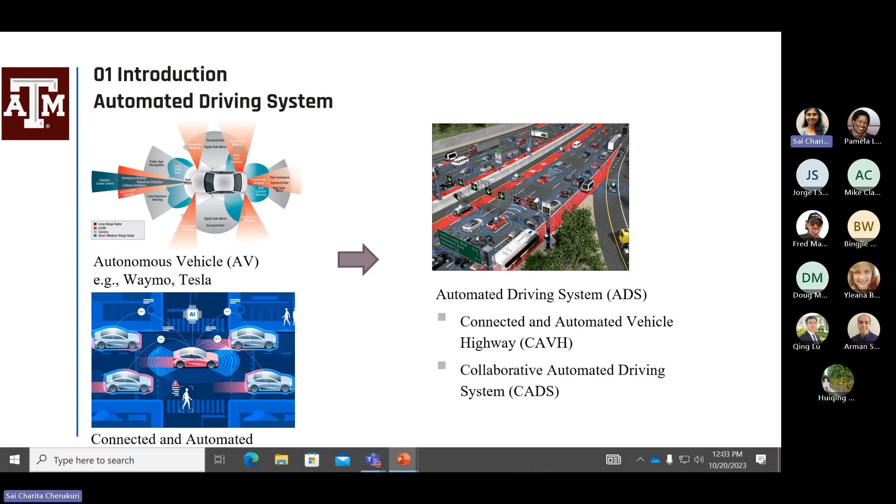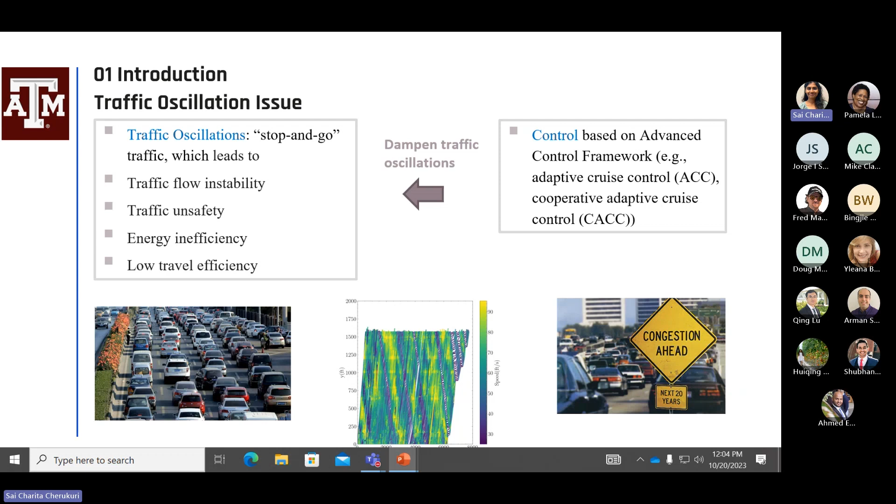One of the traffic problems that we daily experience is traffic oscillations. Specifically, we experience stop and go traffic. When a little stop and go happens at the very leading vehicles, this stop and go phenomenon can get amplified, which leads to traffic flow instability, traffic unsafety, energy inefficiencies, as well as low travel efficiencies. So enabled by connected automated vehicles, we aim to develop control based on advanced control frameworks, such as adaptive cruise control and cooperative adaptive cruise control, to further dampen this traffic oscillation.

Nowadays there are generally three types of methods. The first one is linear or nonlinear analytical CAV controllers, then model predictive control, as well as traditional deep reinforcement learning controls, and all three have some pros and cons. For the linear or nonlinear analytical CAV controllers, they are very easy to implement and very convenient for stability analysis since they are analytical. But it's really hard to explicitly incorporate multiple objectives as well as safety constraints.

For model predictive control, it can optimize multiple objectives in a flexible constraint framework, and it can achieve accurate control performance by a rolling implementation horizon. But sometimes it requires the formulated problem to be convex and to solve it online. Once the MPC is very complex, it is usually computationally demanding for real-time implementation.

For the traditional deep reinforcement learning-based controllers, they can capture varied and stochastic characteristics by embedding this stochasticity in the training environment. The neural networks help to better solve integrated non-convex control problems. Once you train it like a black box offline, it can be really fast computing in online implementation. But sometimes the training process is unstable, it lacks interpretability due to the black box property, and it's poor for generalization, especially for some corner cases, where it performs really badly.

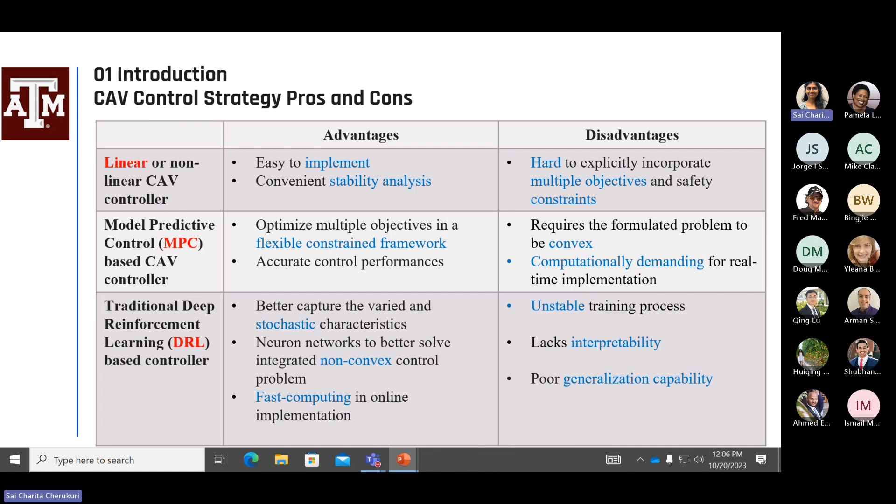So in this sense, let me further refine the CAV control strategy challenges for mixed traffic, especially in terms of traffic oscillations. Firstly, how can we develop a fast, multi-objective, and stable control method to achieve system-level performance? We know the deep reinforcement learning approach is usually AI-driven and data-driven, and it's really hard to incorporate control theories to facilitate the control performance.

Another question is how can we incorporate traffic flow theory into this microscopic CAV control? Furthermore, there are also some strong assumptions, for example, perfect communications between CAVs and perfect vehicle dynamics for CAVs. So especially in the context of mixed traffic, all of these difficulties require a new framework or new thinking to organically integrate control theory, system stability analysis, AI, traffic flow theory, and simulation experiments together to have better CAV platoon control or car following control.

So with these challenges, we need to better understand the human-driven vehicle stochastic and uncertain nature in the mixed traffic, as well as the heterogeneity of the mixed traffic with different topologies from different combinations. So given that, I will further describe our research scopes and overall structure.

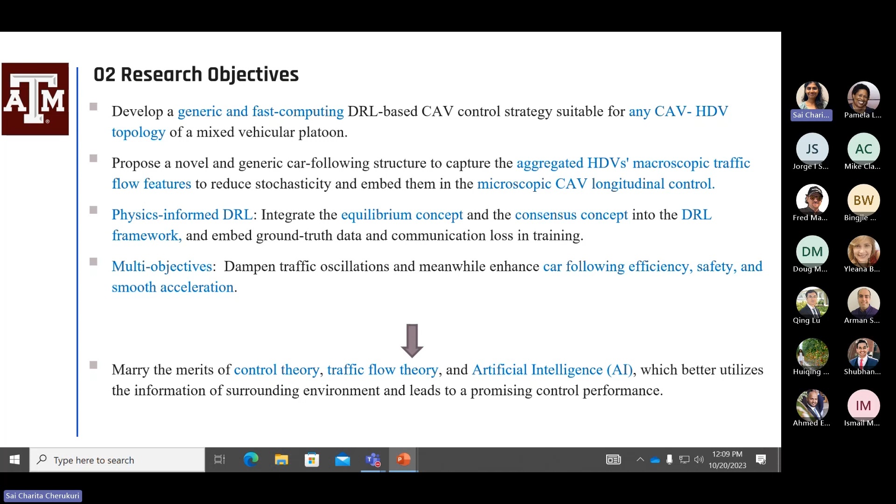And we will further integrate the equilibrium concept as well as the consensus concept, widely known in control theory, into this deep reinforcement learning framework. We also aim to achieve multiple objectives containing traffic oscillation dampening, as well as car following efficiency, safety, and smooth acceleration. So in this work, we aim to marry all these very advanced theories into an organic framework specifically for the control task.

So essentially, we can divide the local downstream communication environment for mixed traffic into two broad traffic scenarios, and the fully connected automated environment has been analyzed very widely before. But we are focusing on the mixed local downstream environment of CAV, HDVs, and CAV topology, because once you have any combination, you can always find these topology structures.

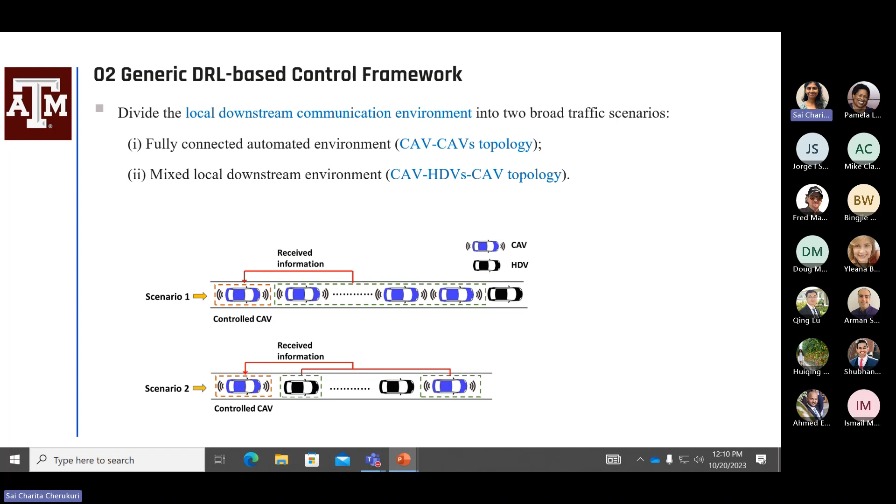And here are some environment assumptions for our research, to clarify beforehand. We assume that CAV state information, such as spacing and speed, can be broadcast to the upstream CAVs through vehicle-to-vehicle communication in real time. The CAV can receive real-time state information of its immediate preceding vehicle using robust onboard sensors. And the CAV can obtain its own real-time information.

We also assume some vehicle communication mechanisms, and here we just use a signal-to-interference-plus-noise ratio as a representation. The automation of CAVs is assumed to be level 3+, and HDVs have no communication capability. So given the assumptions, let me further move on to our control framework.

So given this CAV, HDVs, and CAV structure, we have state fusion strategies and deep reinforcement learning-based car following controllers. Once we output the car following control input, it will go through the vehicle dynamics. The main philosophy of our control is based on these state fusion strategies, which can better help to incorporate macroscopic features to reduce HDV stochasticity. Let me further explain it.

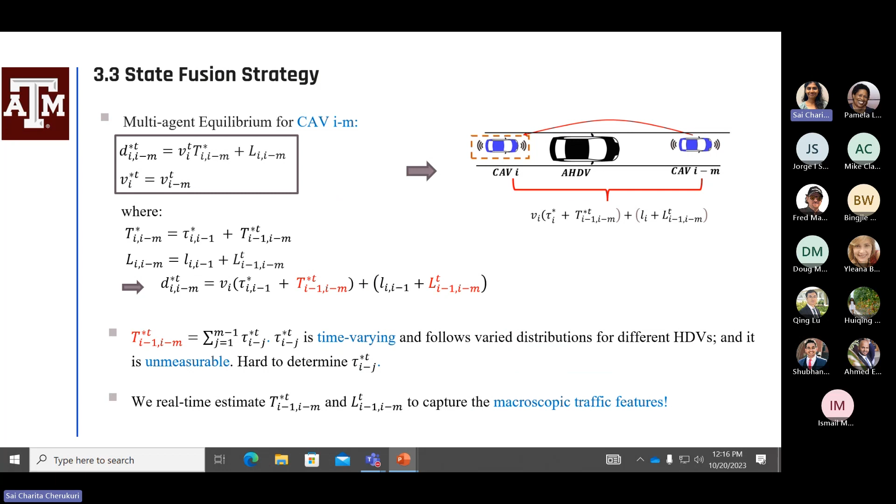So essentially, when we compute this multi-agent equilibrium for CAV I minus M, it equals the summation of the gaps between vehicle I and vehicle I minus M for all HDVs inside. And then we have this time-variant distribution of the aggregated HDVs' time gaps. And we know it is like a fundamental diagram, and that's why we better capture the macroscopic traffic features.

So essentially, we use a simplified Newell's car-following model to bridge it, and from the simplified car-following model we know, once you aggregate it, it's very related to the congested spacing as well as the kinematic waves. So using this, we define a real-time estimate for these traffic waves, and then better guess the aggregated time gaps for the aggregated HDVs within each CAV.

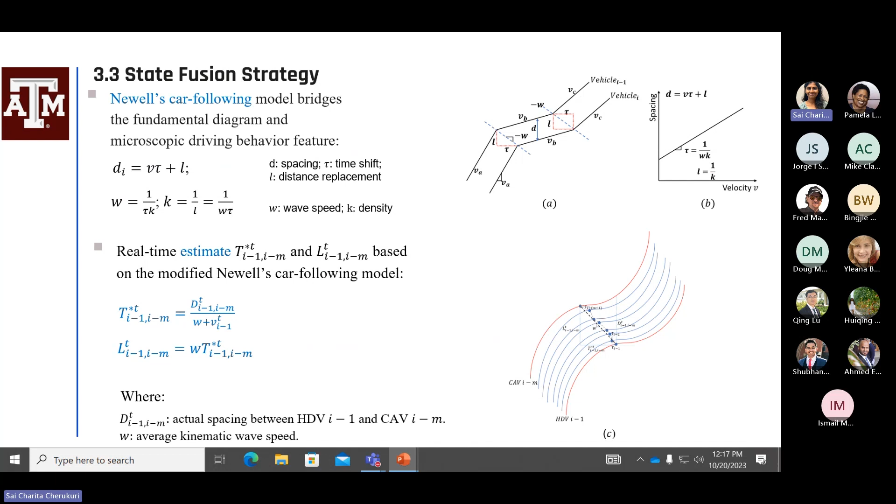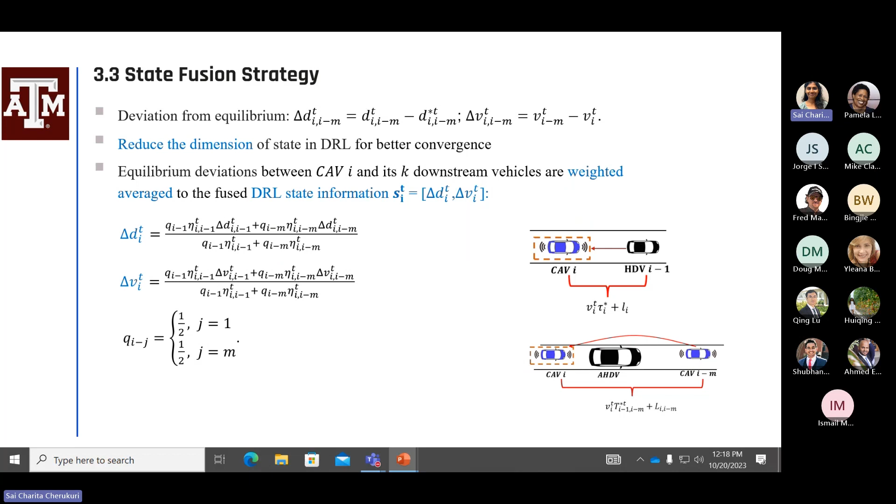So by that, we can compute the deviation from equilibrium spacing between any vehicle I and any vehicle I minus M. And it helps to reduce the dimension because we don't guess what's happening inside this aggregated HDV. We just focus on the HDV itself. And we feed forward, firstly, the spacing between CAV I and the AHDV, as well as the spacing between the AHDV and CAV I minus M. And by some weighted average, we can compute the general deviation from equilibrium spacing for this distance, as well as the speed difference.

So based on that, we try to incorporate this state into the deep reinforcement learning framework, which has 4 components: the state, the reward, the environment, as well as the action. Specifically, we define the state representation as the weighted average spacing and speed difference. And then we define the action as the vehicle's acceleration. Essentially, training a DRL is to find the optimal policy, or the optimal parameters of this car-following neural network. And then we need to better design a reward to realize this deep reinforcement learning training.

So all these elements are very important, specifically the reward design. Firstly, we have objective 1, which is the car-following control efficiency, and we intentionally set it as a quadratic summation of the state deviations. This quadratic form of the state is intentionally designed because we want to make it very similar to a linear quadratic regulator in linear control, to keep the state close to the predefined equilibrium. And these terms can better help regulate all the deviations back to the equilibrium.

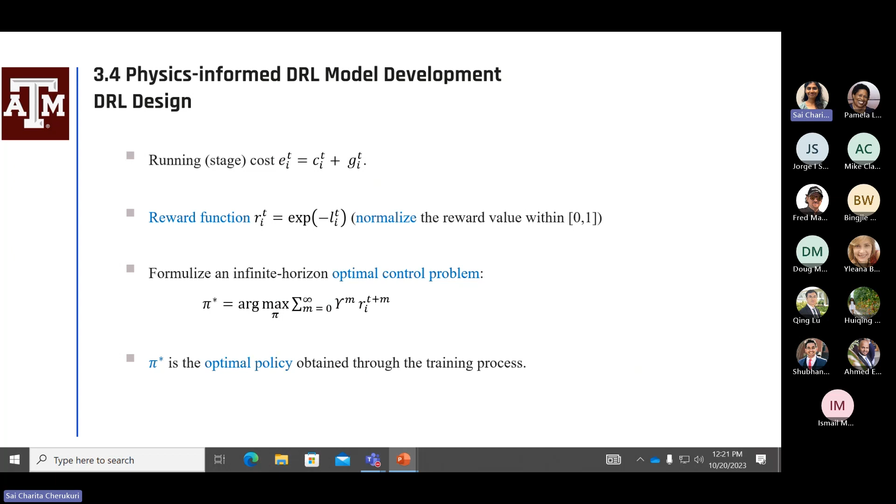And the running cost for the DRL actually is the summation of those two terms, and this is a very practical routine for DRL practice, and we let the reward function be the exponential terms weighted by the times, and then we just try to find the optimal policies. And here we just applied the widely known distributed proximal policy optimization algorithm to train the neural networks. And here are some hyperparameters.

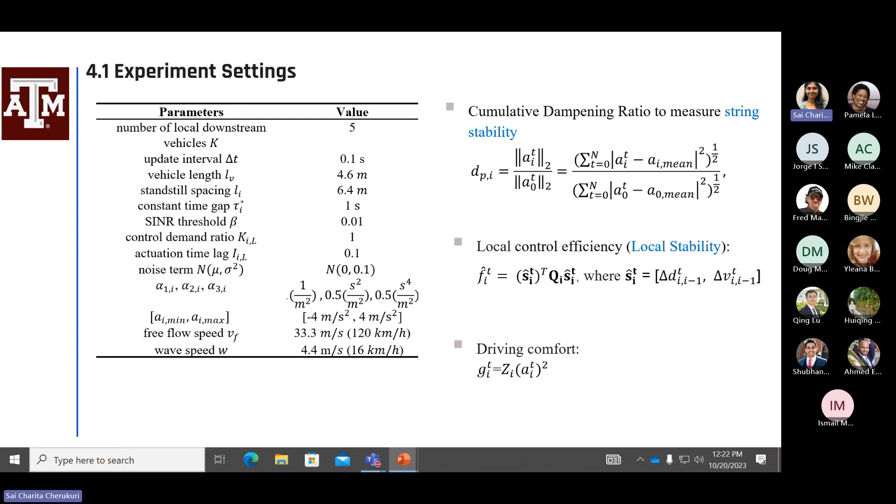So given this very routine strategy, though very novel in terms of the state fusion, let's see how it works. We further define some metrics such as cumulative damping ratios to measure the string stability, widely known in control theory, and we also measure the local efficiency to see whether it is locally stable, and we use the driving comfort term, the square of the acceleration, to see whether it can provide a very smooth control.

And here are some examples that we ran. The first one is the distributed CAV control by our method. Another one is decentralized CAV control, which does not care what happens downstream, only the vehicle you are following. And we also compare with other strategies, for example, the linear-based CACCs and the model predictive control-based CACCs. As you can find, our method provides the lowest damping ratios, which means we can better stabilize the mixed traffic. We also provide the lowest driving comfort cost, so our control is better, and we can provide larger average velocities based on this analysis.

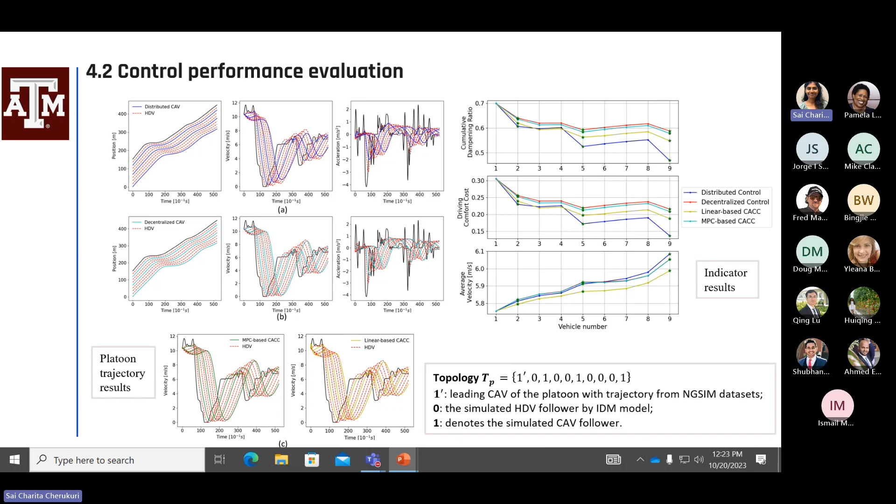We also conduct a sensitivity analysis for the mixed platoon with different penetration rates. Here they are all positions, but one is colored with velocity and one is colored with acceleration. We can find that especially when there are no CAVs, once there's a little bit of traffic oscillation, it gets amplified through the vehicular string, manifested by the speed decreasing and the acceleration oscillating. And we find that once the CAV percentage is around 40%, we can achieve very smooth traffic control.

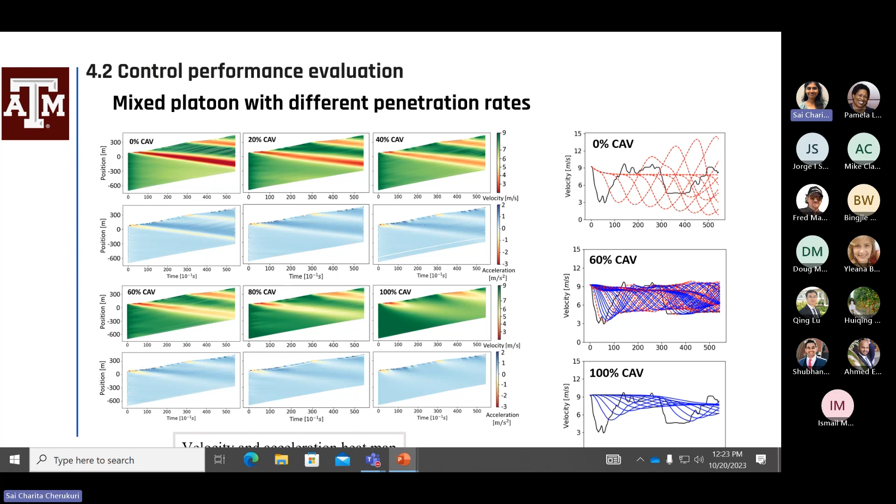We also conduct a generalization capability test with 150 data sets, essentially different traffic scenarios with different traffic oscillation characteristics. We find that our control is really robust and can achieve the damping ratio regardless of the market penetration rate. But once the penetration rate increases, it benefits the traffic flow generally in terms of damping ratio, driving comfort, as well as average velocity.

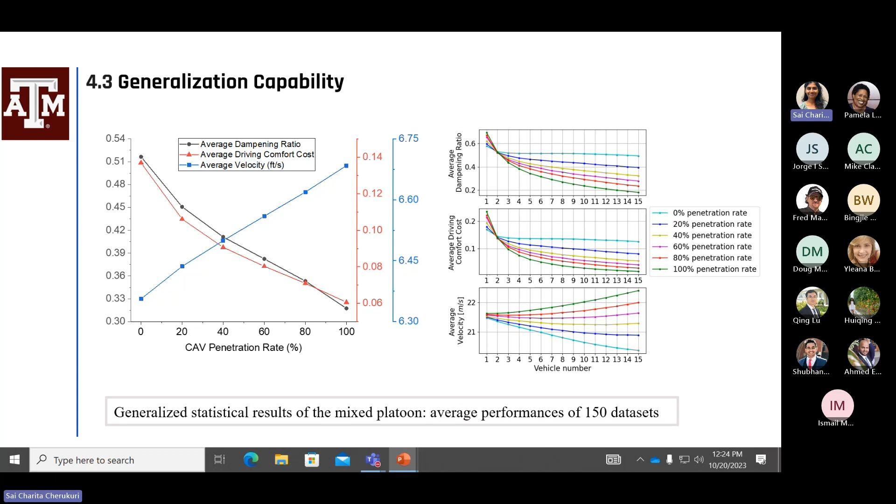We also set some irregular initial conditions to mimic merging behaviors, and we found that our method can also quickly recover to the equilibrium while still dampening the traffic oscillations.

Then let me move on to some summaries and future extensions, not limited to this work. For this work, we developed a generic and fast-computing deep reinforcement learning based CAV control for any topology, even under communication loss, nested in the training environment. We also propose a novel and generic coupling structure, CAV, aggregated HDVs and CAV, to better capture the HDVs' macro traffic flow features. And we integrate control theory, traffic flow theory, and AI together, which achieves better control performance than state-of-the-art methods.

Well, then we are also thinking, essentially the road is not straight, right? In the urban or rural environment, the CAV movement is essentially two-dimensional. So the question comes: how can we readily extend our framework to 2D? Essentially, we apply a curvilinear coordinate, and the philosophy is very simple. One axis is along the center line of the path, and the other axis is perpendicular to the tangent of this path. So it's really different from the traditional Cartesian coordinate.

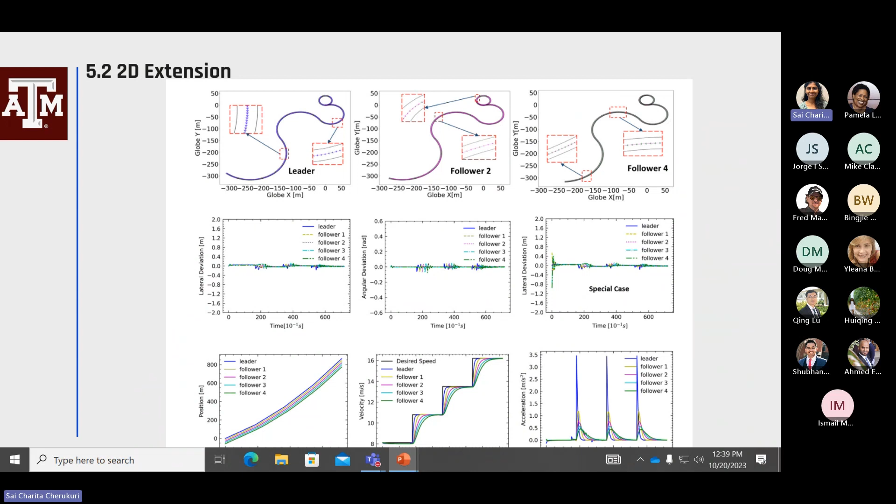Yeah, thank you. Some questions for you. First, I'm wondering, can you share some insights into the stochasticity in human drivers? I noticed you had two papers. My question is, do you find the stochasticity only in acceleration or in both acceleration and deceleration? And are they actually independent random processes?

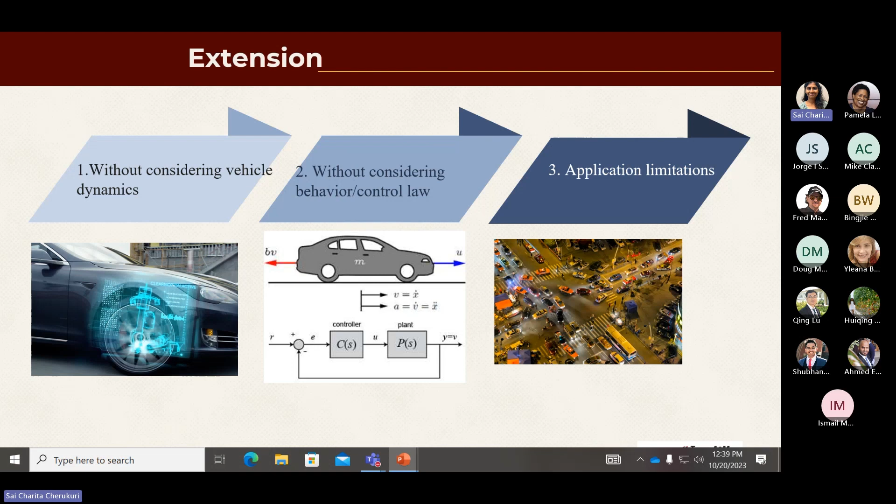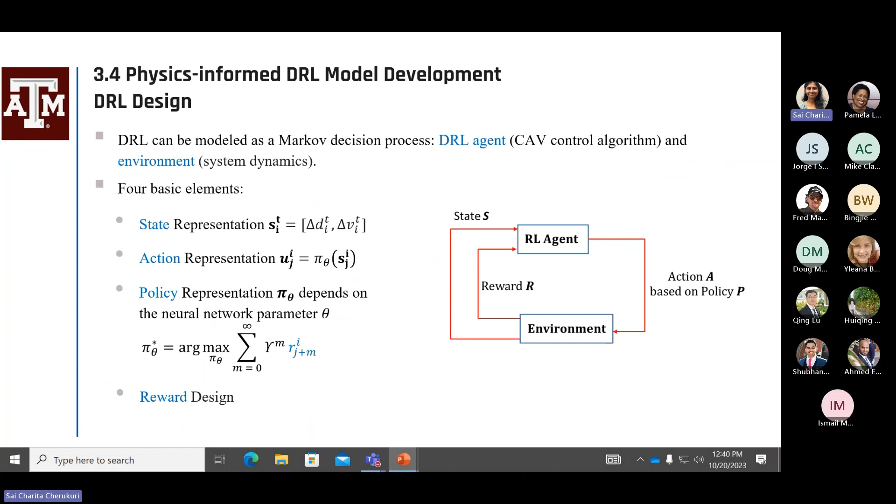Okay, cool, that's a great question. We know that individual drivers are very stochastic. For example, in these two papers, even for one driver, we find there are intra-heterogeneities as well as inter-heterogeneities for human drivers. And based on our approach, especially this one, we also find even the law, or the functions of how they respond, are really different.

So that's why in our papers, rather than capture individual vehicles' behavior, we capture a string of vehicles' behavior, because we know macroscopic fundamental diagrams work. I believe you are also an expert in traffic flow theory. The aggregation of human drivers' behaviors follows the triangular fundamental diagram, though there's some stochasticity inside. But once you sum it up and take expectations, by the central limit theorem it should follow a normal distribution. In this sense, we reduce the stochasticity.

But I agree with you, for individual drivers, even a very small random noise may result in very different behaviors, varying from person to person and also over time. So that's why we use aggregated HDV behaviors in our control framework.

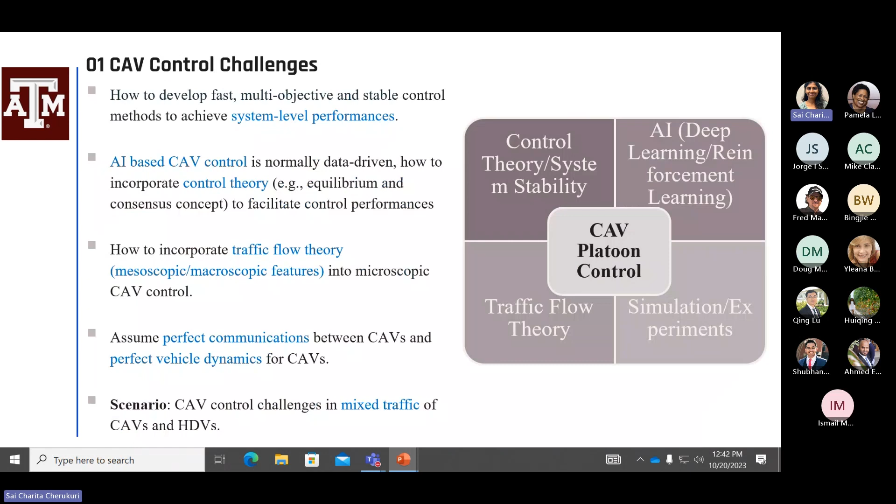Yeah, I agree. Actually, the errors for human driving are compared to the mean, and the mean is Newell's model. I want you to comment on whether the deceleration process is more deterministic compared to the acceleration process, since you have shown data on stochasticity here. Yeah, that's a good problem. In this framework, no, we didn't really distinguish acceleration or deceleration, because we used Newell's model to capture it, and Newell's model is symmetric.

But one way we accommodate this behavior is that we estimate Newell's model in real time, to reduce deviations from the simplified Newell's car-following model. But I agree with you, because Newell is symmetric, if we used an asymmetric simplified Newell's car-following model, it could work better. Still, with this philosophy, it performs pretty well compared to state-of-the-art methods. Okay, thanks so much.

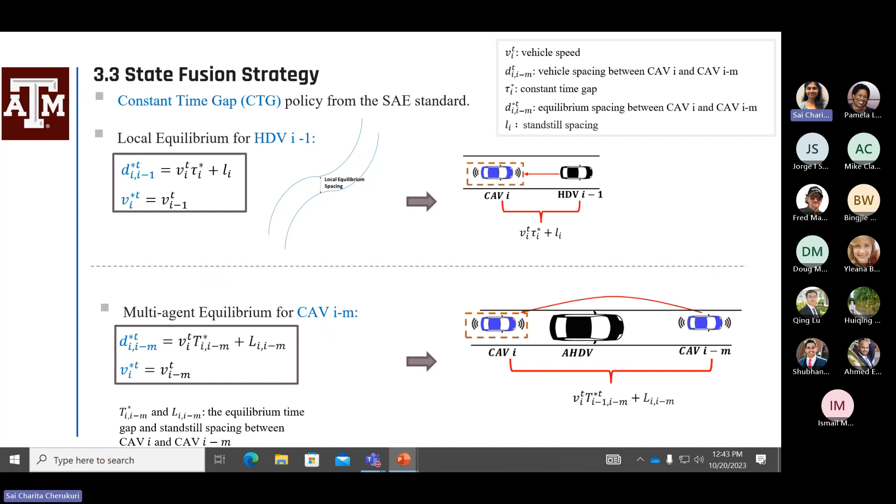Next question. I don't quite get the DRL framework here. Can you briefly elaborate on what the state for the CAV is? I get the point that you try to get aggregated features, treating all the vehicles between CAVs as a whole based on Newell's model. Then those aggregated features are sent to the following CAV. Starting from there, what is the following CAV doing?

Sure. Firstly, the state is a weighted average of two car-following processes. One is controlled CAV i following the HDVs, and the HDVs following CAV i minus M. We consider both spacings, and by weighting them, we compute the deviations from the desired equilibrium spacing for those two car-following processes and fuse them together by weighted average.

So that's what we call state fusion strategies, because we consider two car-following processes: CAV I follows AHDV, and AHDV follows CAV I minus M. Because if the AHDVs deviate from their equilibrium, they will keep generating these oscillations, right? So by this weighted average, we bestow our controller with some predictive capabilities, because we also want to anticipate what happens as this AHDV follows CAV I minus M. So that's how we do state fusion: basically, two coupled processes in a holistic manner.

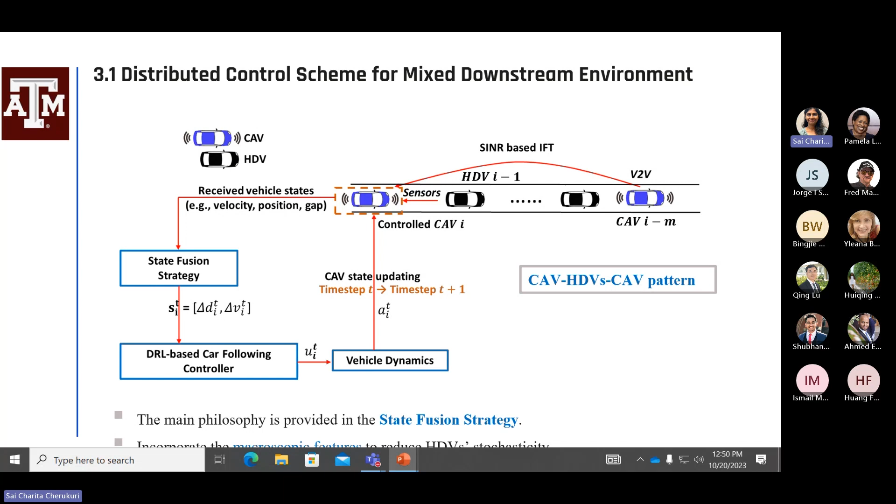I'm not in this field, but it seems to me that your model framework is mainly for the longitudinal control of vehicle movement. Can this accommodate interruptions like lane changes, on and off ramps, and intersections? Yes, actually, that's what I'm writing right now, a proposal called universal control laws for this. But in general, think about it, right? That's a really great point. Oops, I just messed up the direction.

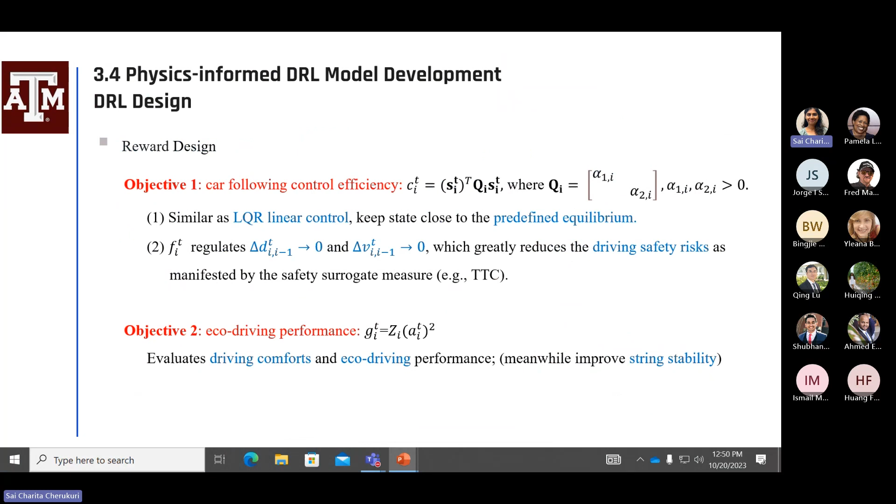Let's say this is a 2D car following, right? And think about there's one vehicle merging. Firstly, this is changed from 2D to 1D already by this curvilinear coordinate, because the path is already one axis, and it's on lateral behaviors.

If there's merging, for example, the vehicle CAV I-1 is some vehicle that's going to merge in, but on another curvilinear coordinate. But you can still put these two curves as one curve, by what we call virtual platooning. Because once it merges, then it's still coupling behaviors after the merging, right? So by this anticipation, we also did some problems very similarly by this virtual coupling concept, or even what we call a time-varying virtual coupling concept. But still, if it's a merging problem, then this is a ready extension.

Well, for the intersections, it could be very tricky. So that's why we wrote a proposal about it. But essentially, my intuition and answer is yes, it can also be changed to a certain level of coupling problems by a comprehensive, systematic dimension reduction and a virtual coupling concept. This philosophy still holds, though it has not happened yet. But my intuition is, you can apply coupling to every driving task, especially microscopic driving tasks, by this very intuitive 2D extension.

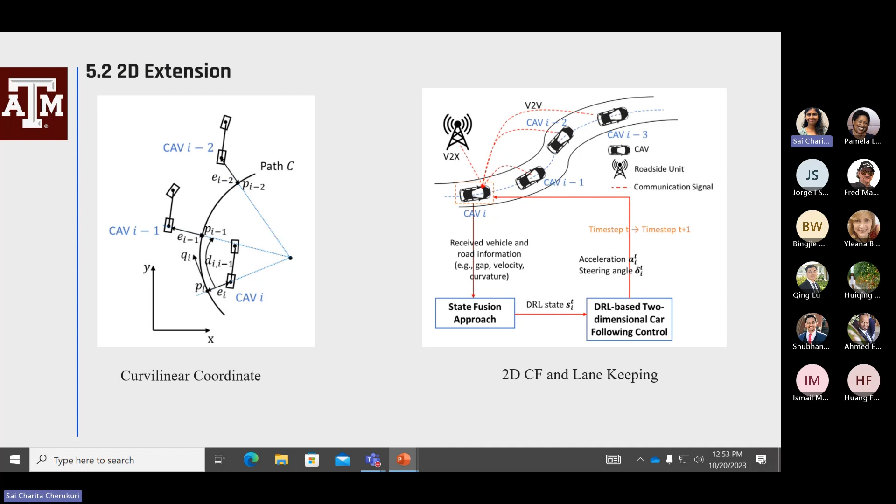Yeah, thanks so much for the question. So here, what we assume is that we can control the vehicle by ourselves, because level 1 is essentially cruise control, then level 2 is adaptive cruise control with some lane keeping functions. So that's why we assume at least they have these functions and then we can control it. That's why it's a prerequisite.

Well, level 4 or level 5 means that for every scenario there's no need for human intervention. It's very related, but essentially, once it's level 1, they are not that intelligent. They don't have these LiDARs. They don't give you the right to connect to the CAN bus of the vehicle, and you cannot control it. So that's why we made this assumption.

Thank you. I have another question. I think your model is mainly for microscopic control, like vehicle trajectories in a localized region, on some road segments. Last week we had Dr. Jorge Laval from Georgia Tech give a talk here in the same room. I think his perspective is more from a network level. He talked about fractals and chaos, the instability of the system due to small perturbations of the inputs or the original states. So my question is, have you considered expanding this to a system level?